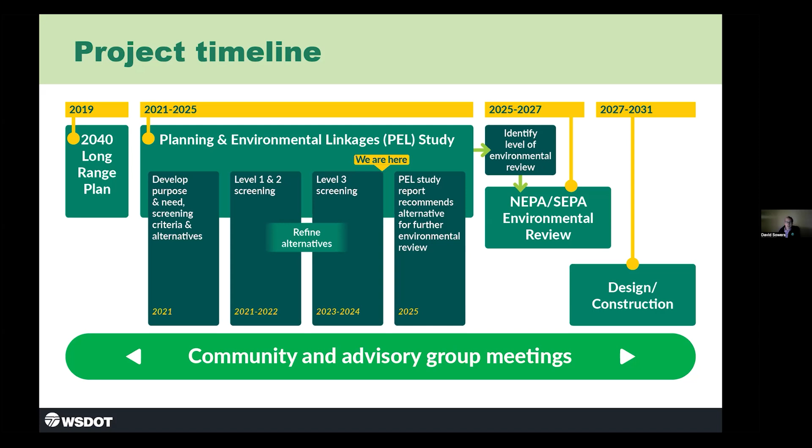Let's go to the next slide. So again, we've been through a couple levels here now in screening. We started out with 15 different alternatives for the Fauntleroy terminal. We narrowed that down in level 2, and in level 2 we narrowed it down essentially to the 2 alternatives that we have, but we've created some subsets of that. This is an important milestone for us because we're now at the point where we're ready to take what we've heard from you over the last several years. We've narrowed it down, we've looked at all of the criteria, and we're ready to share with you what the results were and carry forward into the environmental process a single option.

The CAG roadmap - we're getting towards the end, let's say. You can see the various steps that we've taken along the way. There was obviously a number of different topics that we've tackled through different products that our consultant teams helped us with: the traffic study, intersection analysis, the environmental analysis, and so on and so forth. And all of that culminates in where we're at today with the final level 3 screening results, and an opportunity for you all to weigh in on what we've concluded, and identify any other things that you would like to bring forward on the alternatives that we're going to present in front of you.

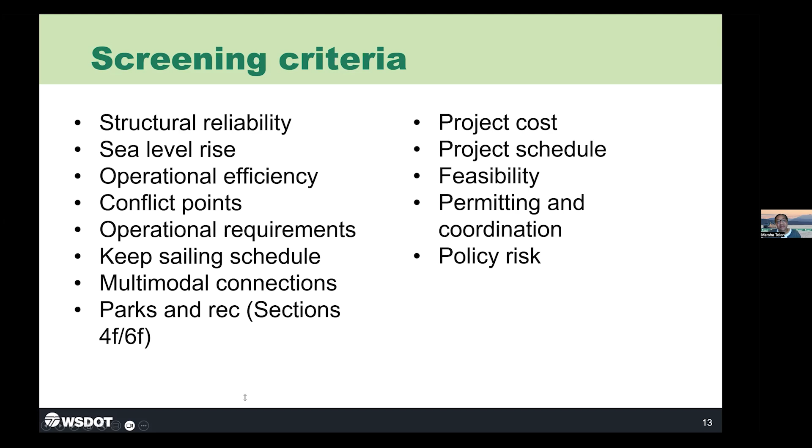The next couple of slides highlight the level 3 screening results. The dark green boxes represent the highest performance rating, lighter green indicates medium performance, and white shows low performance. Haley is going to add a copy of the report in the chat, so if you want to follow along, you can do so.

The screening results showed some factors perform the same across all alternatives. For example, we're building a structurally sound terminal that will accommodate rising sea level, regardless of which alternative advances. That came through clearly in these summary slides.

Regarding the key criteria, in reviewing the results, we focused on the performance factors that differ between alternatives, in particular operational efficiency and environmental factors. These two categories are most critical to meeting our purpose and need, while minimizing impacts to the surrounding environment and community as much as possible.

We have heard from all 3 advisory groups and our tribal partners about the importance of minimizing impacts to the surrounding environment and building a terminal that operates more efficiently. As you can see from the shading, alternatives B and B3 have the most dark and light green boxes. Next, we'll dig into these results and talk more about what this means.

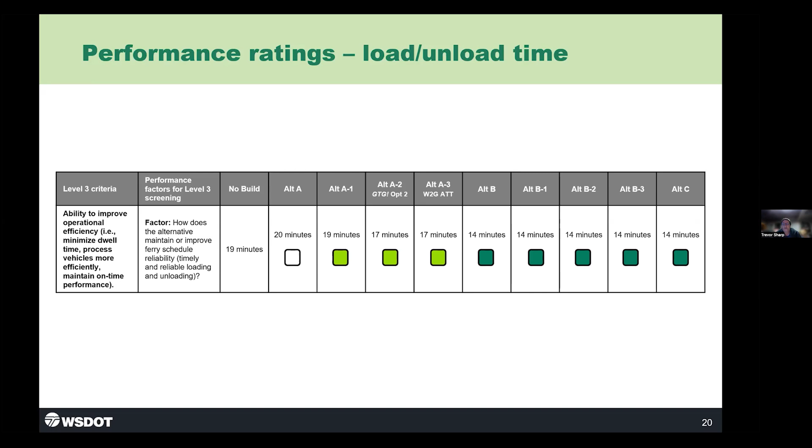Our next performance rating was queuing. This key factor looks at impacts to vehicles queuing on Fauntleroy Way. WSF estimated queuing of vehicles for weekday and weekend conditions. High performance rating meant a lower percentage of sailings with queuing, shorter queue lengths overall, shorter peak queue lengths, and/or faster reduction of queue length over time. Medium meant similar percentage of sailings with queuing and shorter queue lengths, or faster reduction in queue length over time. Low meant a higher percentage of sailings with queuing, greater queue lengths overall, greater peak queue lengths, and/or slower reduction of queue lengths over time.

And there was our rating: Alternative A was low, Alternatives A1, A2, and A3 were medium, and all the Alternative Bs and Alternative C were high.

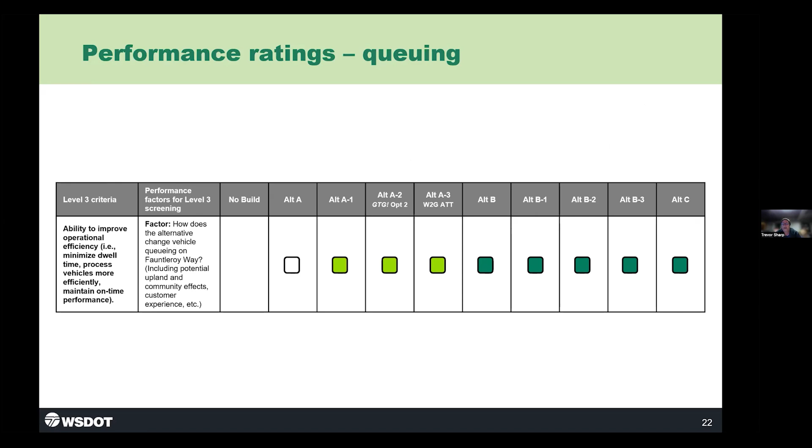Our next factor was vehicle staging. We designed all alternatives with wider lanes and improved lane configuration to better manage ferry loading and vehicle sorting for the dual destination sailings. High performance rating applied to alternatives with at least 4 full-length lanes of greater length, but no more than 4 full-length lanes where half-length lanes are used. Medium applied to alternatives with more than 4 full-length lanes of greater length where half-length lanes are used. WSF reviewed the largest dock configuration, Alternative C, with 5 full-length lanes and 2 half-length lanes, and determined that although it provides some improvement in staging ability, it may be challenging to manage vehicles. Low performance rating applied to alternatives that do not add full-length lanes.

Now the ratings: all A alternatives and B3 received low ratings. Alternative C received medium, and Alternatives B1, B, and B2 all received high ratings.

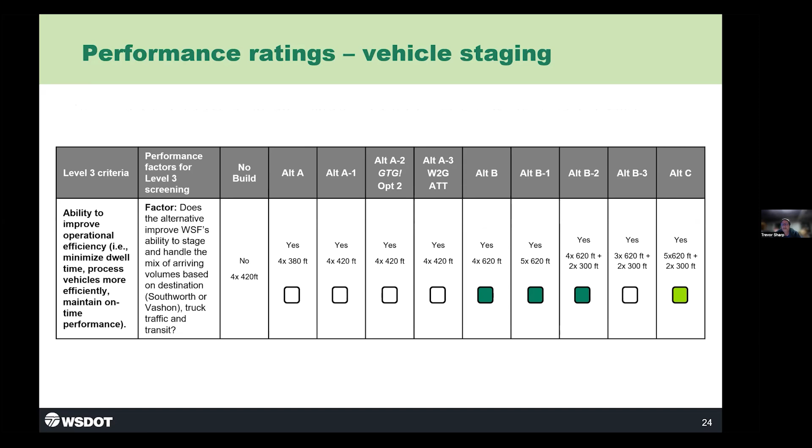Next up, vehicle sorting. WSF designed all alternatives to provide 1 12-foot ADA lane, 2 10-foot truck lanes, and 1 9-foot lane minimum to assist with accessibility, managing loading, and sorting vehicles. Our high performance rating applied to alternatives that provided more lanes and some longer lanes, providing the most space to sort and accommodate ADA, emergency vehicles, medical requests, and other preferential loading categories.

Our medium performance rating applied to alternatives that provide the same number of lanes and some longer lanes. These alternatives offer some improvement in the space to sort vehicles. Our low performance rating applied to alternatives that do not add or build longer lanes; these alternatives do not improve space to sort the vehicles.

And there you go: all A's are the low standard, Alternative B is a medium standard, and Alternatives B1, B2, B3, and Alternative C are all high standards.

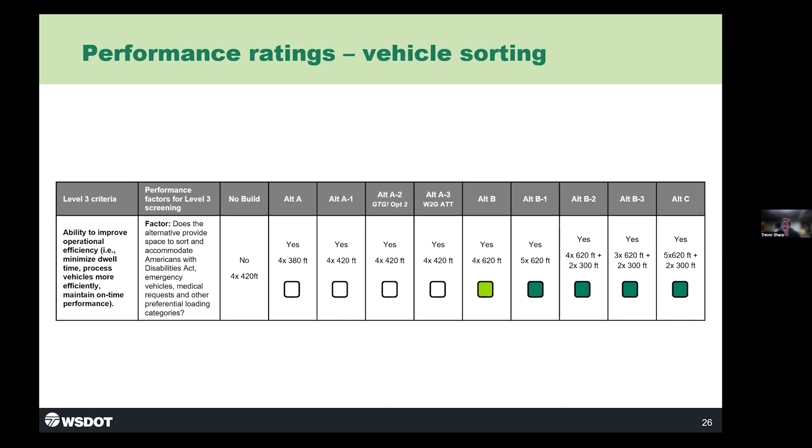The next factor we looked at was the distance for people walking, biking, and rolling onto the ferry. Our high performance rating applied to alternatives with a distance to walk, bike, or roll from Fauntleroy Way to the end of the vehicle transfer span of no more than the current dock, which is 850 feet. Medium performance rating applied to alternatives with a distance between 850 feet and 1,050 feet, less than 200 feet further than the current dock. We did consult our ADA specialist and noted that a walkway distance within 200 feet is similar from an accessibility standpoint if there are enough places to rest and an appropriate grade.

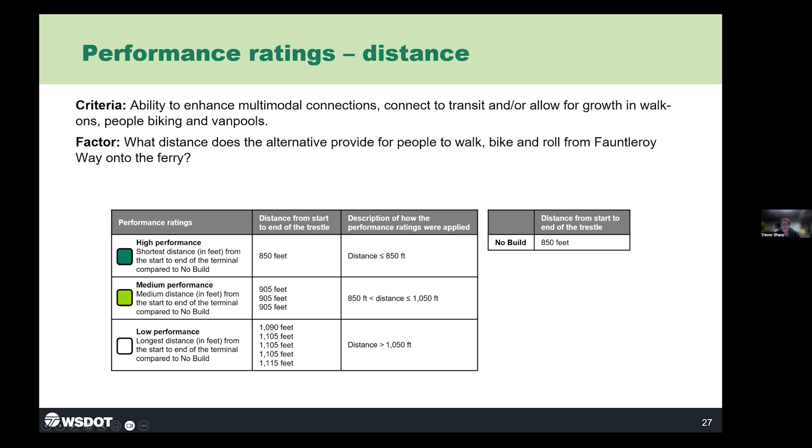We will consider incorporating those rest places during the next project phase. Our low performance rating applied to alternatives 1,050 feet or more, or more than 200 feet further than the current dock. The results: Alternative A was high, Alternatives A1, A2, and A3 were medium, and Alternative Bs and Alternative C were low.

And I believe next up is any questions for operations.

Trevor, we just did want to pause there. That's a lot of information, and I'm sure there are some questions and comments for Trevor. Trevor, the first one is simple, asking if the results are based on the 3-boat schedule at all times. Yes, it's one of our assumptions looking out to the future. Okay, thank you.

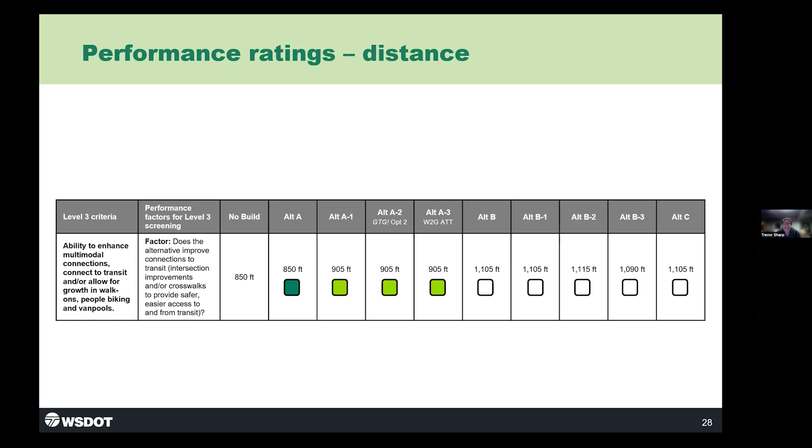One thing that confused me was under option C, the comment was made that it was maybe difficult to manage the operations, apparently because of the additional lane. That confuses me. It would seem like it might be simpler, but I'm curious why it would be more challenging.

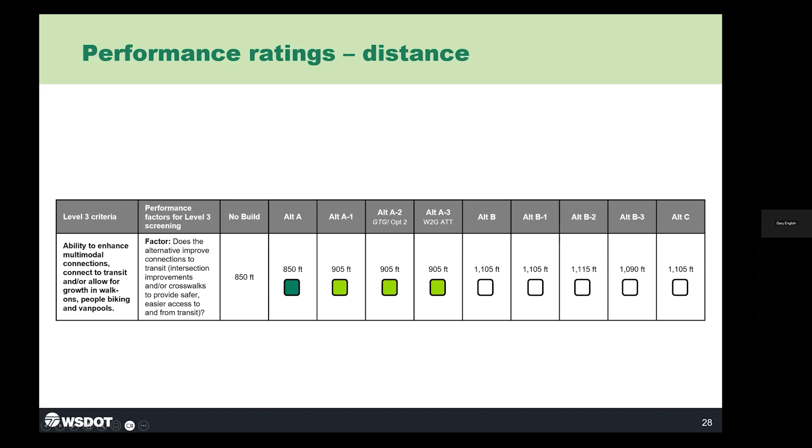The reason it's more challenging is if it was like a one destination place, it'd be a lot easier to manage because we could just keep rolling the lot over. When you get 2 destinations, like we are now, you have an 80-car lot and add another 100 cars onto it. If we loaded 124 cars on, we'd still have 60 cars left behind. For our staff, it's hard to figure out with a dual destination which vehicles are going to go first and which ones aren't. Does that make sense, Gary?

I understand where the rationale comes from, but it doesn't make sense. We have people that have been moving cars on the docks for decades, essentially, and you're saying because we have a bigger dock, it's more difficult to do what we have been doing for a long time. That doesn't make sense. Well, we're looking for efficiency is what we're looking for.

My retort to that is, if I have an additional lane, which the C dock does, then I would think I'd have more options for efficiency. I could load whatever group I want to put in there. I just don't see that comment fits the C. But I'm going to leave it with you guys because you're the ones that have to make it work, not me. I just have to ride.

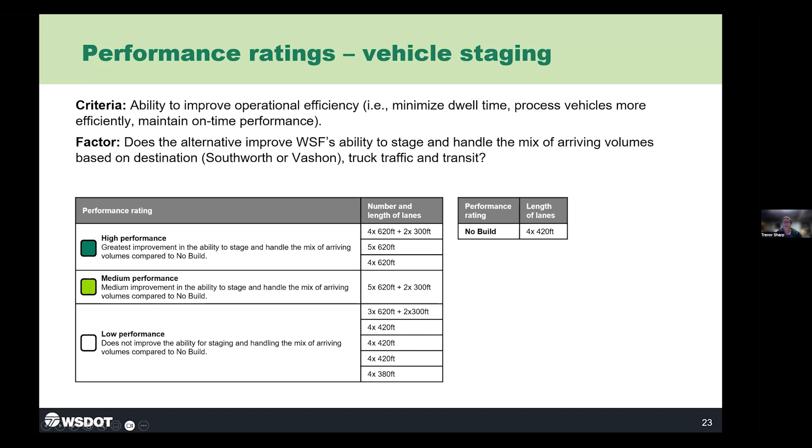I'm not sure. Charlie, can you, or Laura, can you bring up B1? Because if I'm not mistaken, B3 does have half lanes. Or am I thinking of the 155s, B1 and B2? But yeah, I think I was thinking B had the longer lanes. B had the same length with two extra short lanes, or B3, B2, B3 did.

...traffic there. And then I see Mark Bandy is maybe off mute. Mark, are you able to come in? There you go, Mark.

Yeah, thanks. Let me try and add on to both Gary and Marty's comments. Part of the dialogue here was really this kind of combination of having an odd full length lane and then the half lanes. That was what, when we talked with Trevor and his other operations colleagues, as Trevor alluded to, just managing the sorting and staging when you're out on the terminal, on the dock itself, with the odd number of lanes and which one's full, and then a couple half length lanes. That's where a larger number of lanes, even in terms of number of vehicles it can hold, becomes a bit more complex and therefore less efficient from how the operation staff felt about it once you're looking at that type of configuration.

Yeah, I see that they have the alternatives up on the screen there, and you can see the confusion because B and B3, it's not really half lane. I mean, the lanes are almost identical except for the very close to toll booth zone 1 area.

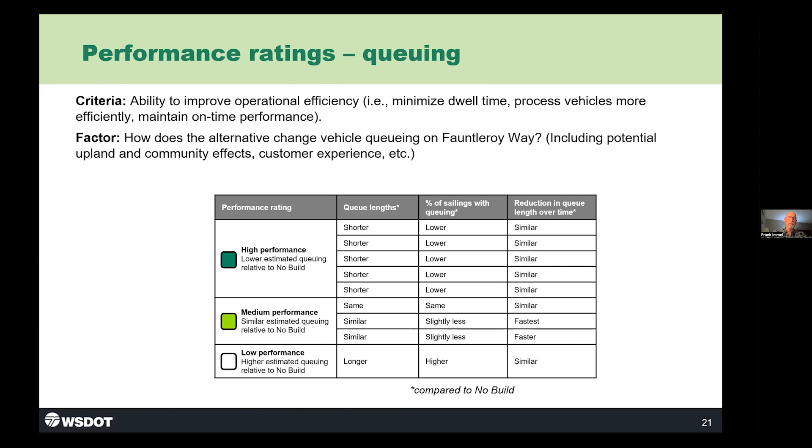Thank you. Can we go back to the slide that shows the dwell time or the loading times? I guess this is the first time I'm seeing that slide. I apologize if it's been shown somewhere I haven't seen. It is shown this way - that's the queuing, the loading time.

So the under 15 minutes, there's so many variables that go into the loading time. I guess you're saying that it's going to save 4 minutes by having a larger dock than the A options. Is that my understanding?

I suppose it's easier if I'm off mute. Yes, you are correct, Frank. And then, but yet the medium performance shows that it reduces dwell load/unload time by up to 20%, and it's anticipated to have some improvement in time performance compared to the no-build option, whereas the other options, the longer docks, significantly improve on-time performance.

Correct. And these are modeled times, correct? Not stopwatch times taken at various times of various days - just modeled? Modeled. So we have no idea how these will actually play out.

Mark, do you want to say a little bit more about the assumptions? Frank, you'll recall when we walked through these results a couple of meetings ago - this is using a traffic simulation model.

It's basically representing the operation of the current dock. You baseline against that, and then use inputs about observations - how long it takes to unload vehicles, walk time, bike time, as well as load time - and then it's comparing that baseline, essentially the existing dock size, to the different alternative dock sizes.

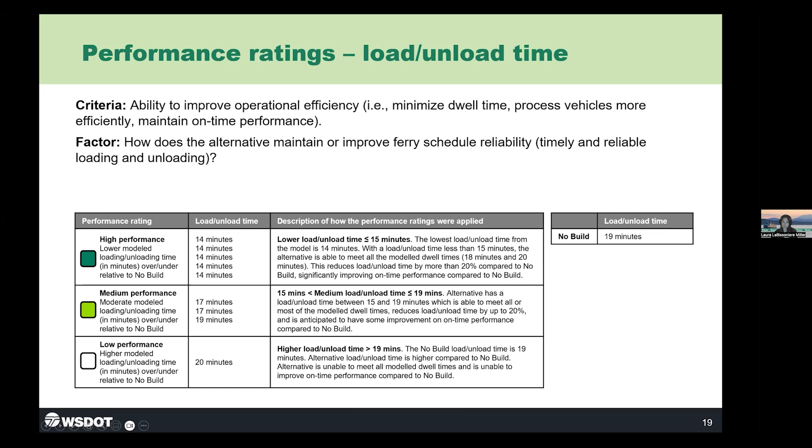Yeah, I think to clarify, if you want to go back to that slide Haley - what Marcia was just explaining is that these are the work products that our team and the analysis that the team has used to think about screening. Many of them are ones we've talked about in detail.

I know when we get a little bit further into looking at the results, maybe Dave can say a little bit more about how we're thinking about costs in the context of screening. But you're right, that's not one where we've sent out a detailed report like the others.

And I also have one basic question, which is these are drafts that you have sent to us, and I understood from long ago that you're taking one alternative forward to the NEPA SEPA. And although we had no input in the decision to get to B or B3, are both of those going forward, or is only one of those going forward?

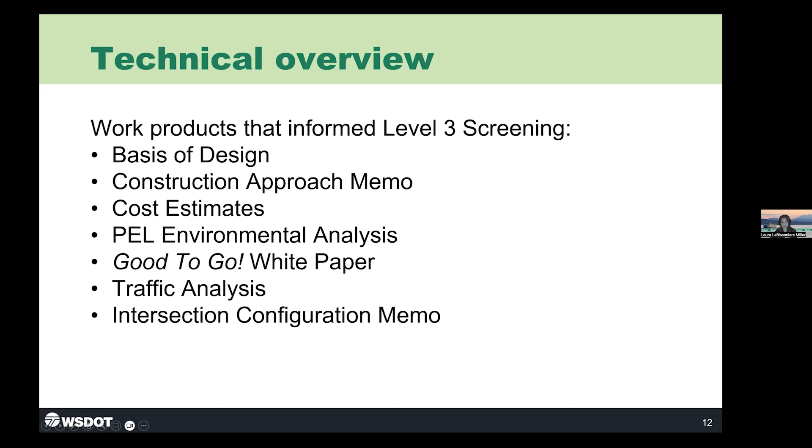Yeah, I think with that comment, Marty, if we could have you hold until the end - Marcia is going to talk a little bit more about environmental, and then we can talk about the process and how we've used the feedback we've heard from all three communities to get to this.

The only reason I bring it up at this point is - are we here today to comment on B1 and B and B3, or are we here to comment on everything?

Because, or is everything else already gone? Yeah, I think that's a great question. We really are seeking your input on the information we've collected up to this point, the analysis. Do you have questions about the process itself, about how we're taking this information and evaluating the alternatives, and certainly we're open to feedback on the alternatives themselves.

And this is not the last point before we wrap up the PEL study, so we'll also talk about other upcoming opportunities for input. I'll just add another comment to your answer there, Laura. You've seen a lot of these work products and commented on them, and those are no longer drafts. We've finalized those documents.

What we were hoping to get out of this evening is for you to look at how we then applied those factors, the 14 minutes, the 19 minutes, the so many square feet here, the so many there, look at how we divided up these areas and assigned low, medium, and high performance ratings, and give us some feedback on how we did the math.

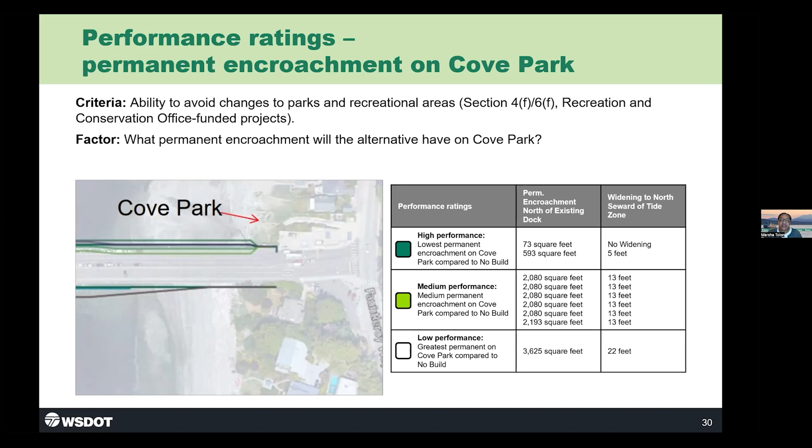The results came out to be that alternative B1 received a low performance rating. The A alternatives and B received a medium performance rating, and B2 and B3 received a high performance rating.

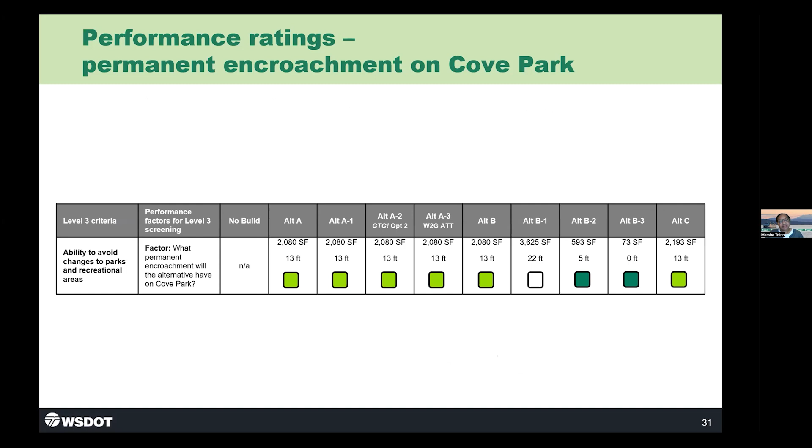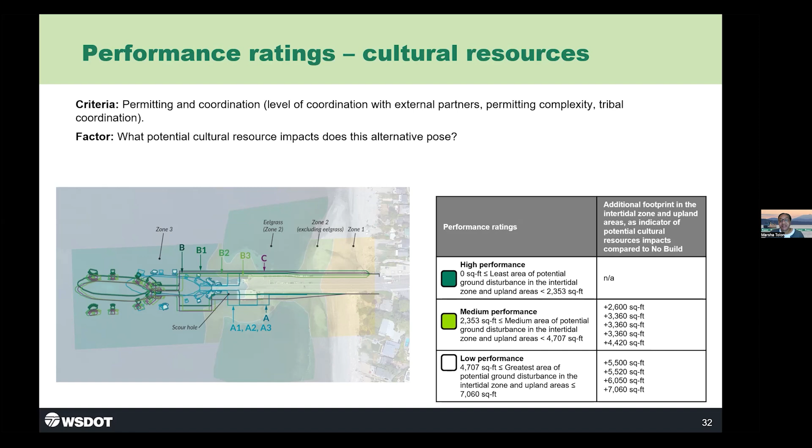For overwater coverage, looking at how each alternative increases that overwater coverage, those that performed high had the least additional overwater coverage, up to 16,667 square feet. The medium performance was with additional overwater coverage between 16,667 and 33,333 square feet, with a low performance rating between 33,333 square feet and 50,000 square feet.

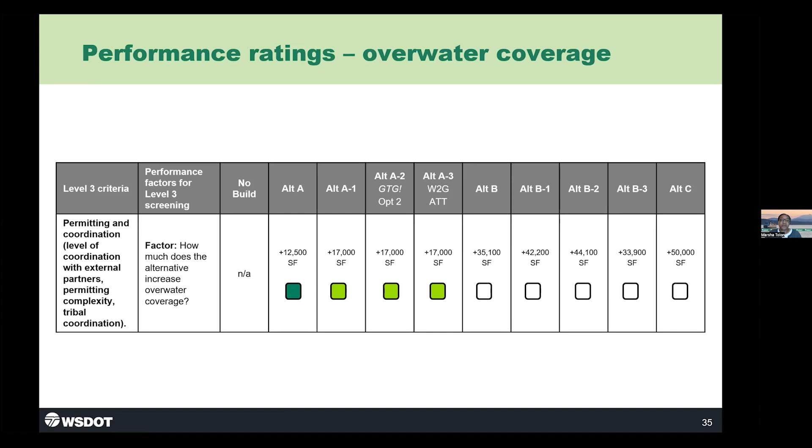The results showed that the rest of the A alternatives received medium performance ratings, and B and C alternatives had low performance ratings in this category.

Let's move to mitigation cost. Indicators of environmental mitigation costs include the increase in overwater coverage in Zone 2. And Zone 2, if you remember, provides the nearshore habitat for eelgrass and macroalgae, and the increase in total overwater coverage.

Moving the dock and berthing structures further offshore into deeper water improves WSF's opportunity to restore eelgrass and macroalgae. This helps reduce or eliminate ferry propeller wash from eroding the scour hole, and may allow for eelgrass and macroalgae to grow in Zone 2.

With the high performance rating, there is no increase of overwater coverage in Zone 2, and no increase of total overwater coverage. We expect these would have the least environmental mitigation cost.

For medium performance rating, the smallest increase of overwater coverage in Zone 2, or the smallest increase of total overwater coverage, and those that perform low had the greatest increase of total overwater coverage, and a medium to high increase of overwater coverage in Zone 2. We expected that these would have the greatest environmental mitigation cost.

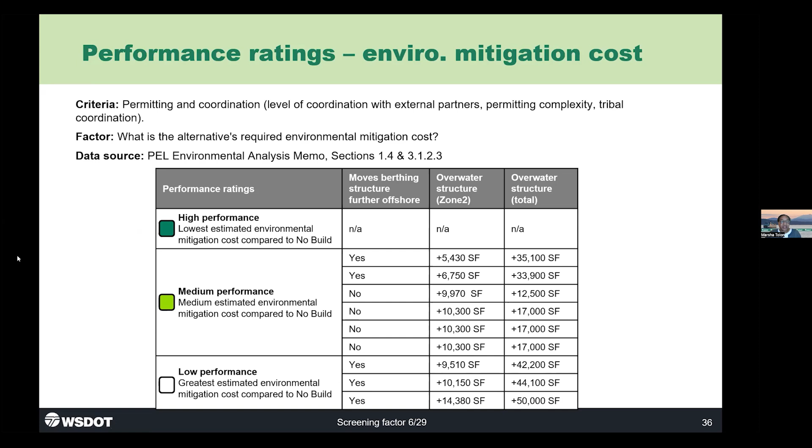The results came out to be that alternative B and B3 received medium performance ratings. A alternatives received medium performance ratings, and alternative B1, B2, and C received low performance ratings.

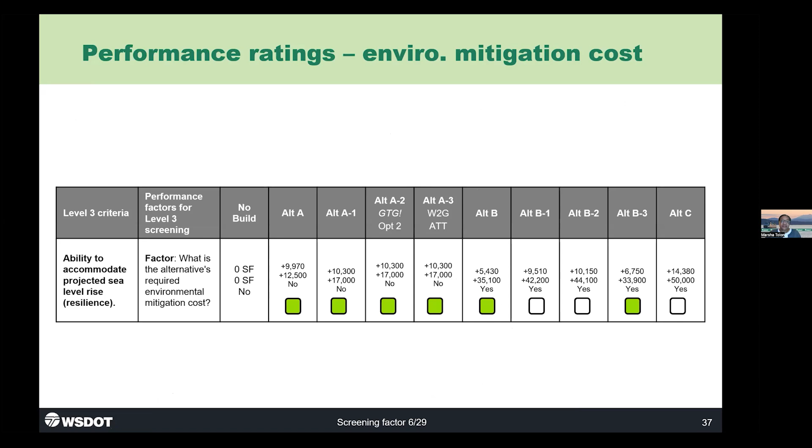The next category is eelgrass restoration. This looks at the impact or provides opportunities to restore macroalgae and eelgrass. By moving berthing structures further offshore into deeper waters, it reduces or eliminates ferry propeller wash disturbance within Zone 2, and potentially allows for restoring eelgrass and macroalgae.

High performance rating is when we move the dock and berthing structures further offshore, and have the smallest increase in overwater coverage in Zone 2. A medium performance rating is when we move the dock and berthing structures further offshore and have a medium increase in overwater coverage in Zone 2. Alternatives that perform low do not move the dock and berthing structures further offshore, or have the highest increase in overwater coverage in Zone 2.

The results from this screening came out to be that it was all centered around looking at the potential for eelgrass restoration. Alternative B is the only alternative to receive a high performance rating. The rest of the B alternatives had medium performance ratings, while the A and C alternatives had a low performance rating.

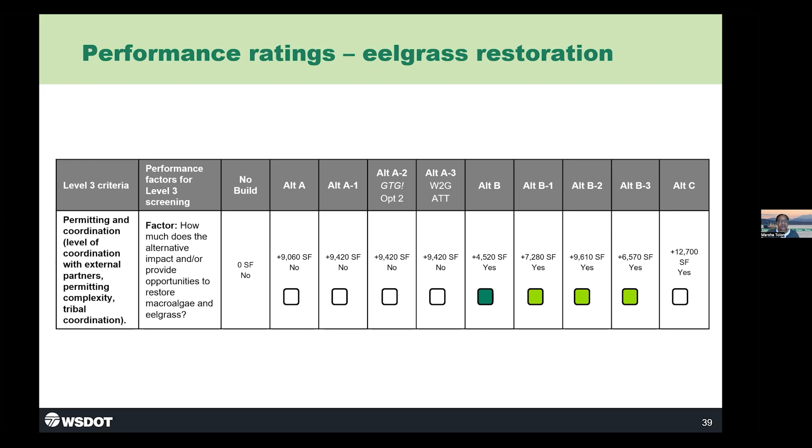So Mark, I'll turn it over to you to explain this screening results.

Yeah, thank you Marsha. We've got lots of time to dive into specifics, but you've heard a nice overview on the two principal categories that drove a lot of the scoring, operational efficiency and permitting and coordination. Somebody made a comment in the chat about the Academy Awards and the drama associated with this.

Pulling back the curtain for those who haven't already looked at the report, what we're recommending to advance is a footprint based on alternatives B and B3, which accommodate somewhere between 124 and 155 vehicles on the dock. I'll caveat that those two alternatives scored the best in our calculus, with B2 a very close second. Alternatives A and C scored lower, and that's where we landed.

I'll highlight a couple of specifics. With alternative A, while it minimized overwater coverage, it also minimized the benefit to operational efficiency. So while it has an environmental advantage, it doesn't allow us to repair the scour hole that's been caused over time or mitigate some of the eelgrass that's been lost there.

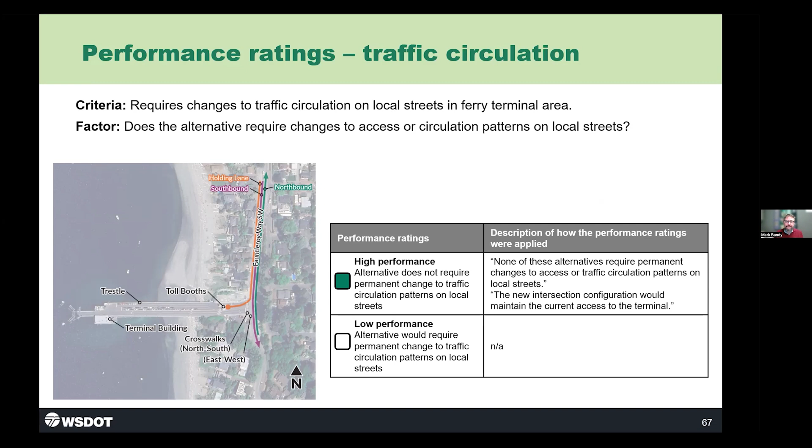Angus, let me start with just a quick question, a reminder please. The focus on eelgrass is around salmon in the very young stage and Dungeness crab. Are there other species that are being protected here?

Well, Angus, I'm not a biologist, but the health of the eelgrass is an indicator of the health of the nearshore environment. So there are a lot of species that live within it, as well as forage fish. It's an appropriate zone for that sea life as well. So it's not just salmon and Dungeness crab, but there's sand lance or species that need that seagrass to be available.

And then have you thought about, or do you think about, the underwater artificial reef aspect to the dock? Like that would be anti-correlated with coverage, right? We've got endangered rockfish in Puget Sound. We've got ling cod, which are fairly protected species in Puget Sound.

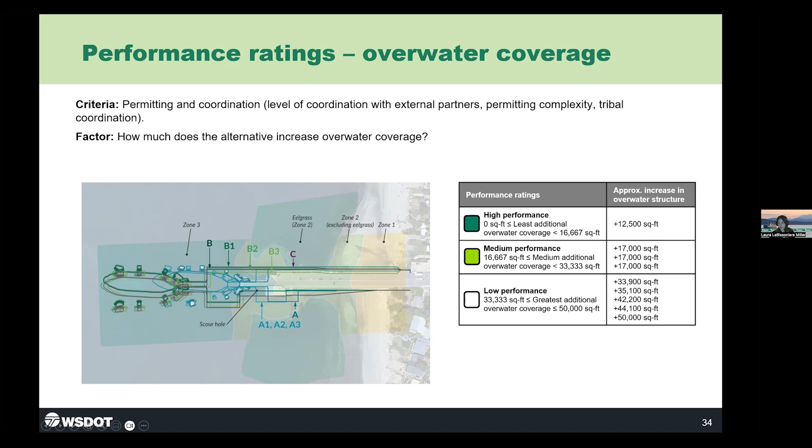We've been getting a number of questions and comments in the chat here, so I just want to acknowledge some of those. Devin is in agreement with Justin about future-proofing dock size for future potential ferries, such as an Olympic class, needing to be a priority. Thank you for that, Devin.

It looks like Victoria had a question here about if the boats are running at full capacity currently, and John Vizina has provided a link to our public dashboard that shows their performance by boat and route. Lots of information there, just putting those up on the chat.

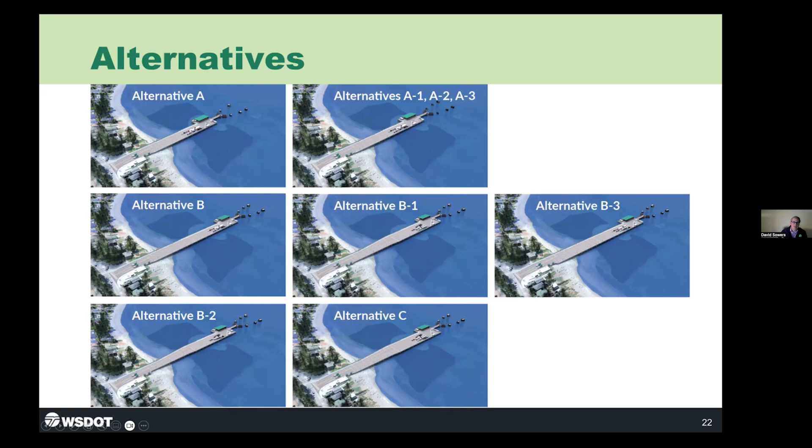Yeah, you want to respond to that? Well, the second slip was never in the original scope, but what surfaced as we did the constructability reviews is that by all measures, no matter how you divide this up, no matter which option you pick, we need to have a second temporary slip so that we can build part of the structure and operate it, and then swap and move the traffic over to the new structure. The only way to do that is to have a second slip off the end of the dock to the north, like this view shows.

But that is not something we're pursuing in our permitting process. It's not something we see having permanency there. We do have a project at Southworth considering adding a second slip, and the legislature is aware of that, but we have not forwarded that concept here. We've heard it, Susan, throughout this process - folks have talked about it in terms of on-time performance, reliability, and the ability to start loading while finishing another unload. Trevor is on the call and knows the benefits of having two slips at any terminal, especially if a slip's not working that day for some mechanical or electrical reason. So it's a good point, it's just not in the cards with the project the way it's scoped.

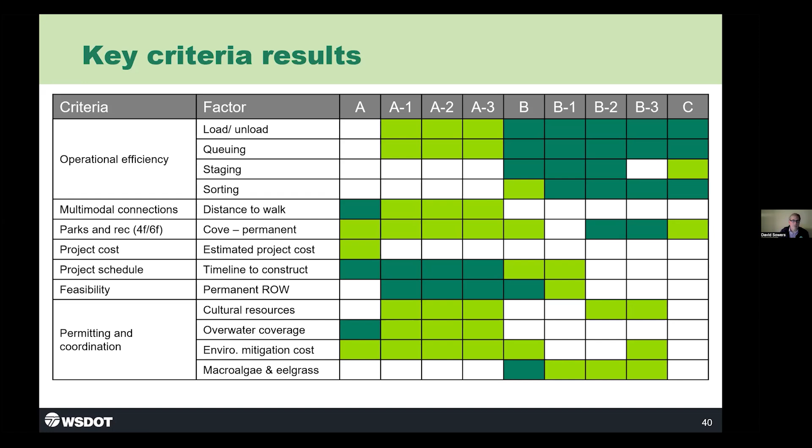When I made my weighting comment, it was more in terms of how we assigned the greens, the light green, dark green, and white, to this amount of square footage of overwater coverage, or this amount of minutes of savings of time, and where we tried to draw lines between 20 minutes and 15 minutes. I'd like feedback there if you think those could be improved upon, or if you have a different perspective. Sometimes it's hard to separate things that just vary in shade of gray, versus more yes or no, so that kind of input would be helpful.

Any input is helpful and would feed this process.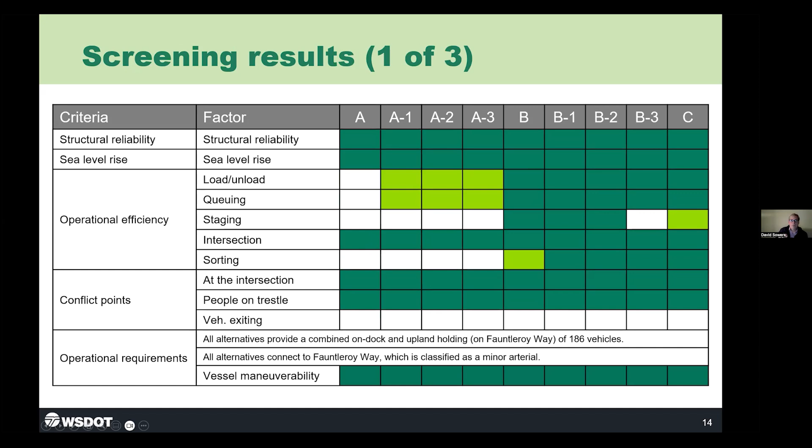Am I correct that there's a second page to this key criteria results as well? There were 3 pages at the beginning of the presentation with all of the screening criteria. But what we did in that last sheet is we took off the criteria where they were all the same color. For example, on structural reliability and sea level rise, every alternative will be designed to the latest standard, so we didn't put that in the last sheet because everybody's going to be a solid green. If there was any difference between the alternatives, we put it on this last sheet, which we call the summary of the key criteria. It's not meant to take away from all the other criteria. Okay, thank you very much.

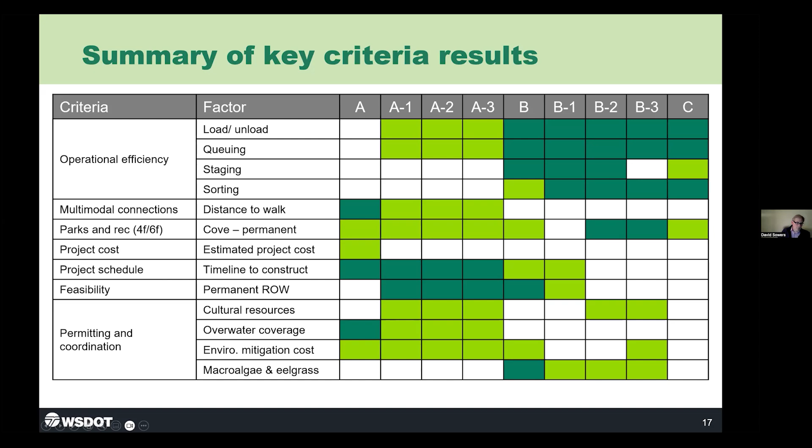Marty? In the tag meeting, there was a discussion of the intersection. Do we have time to talk about that tonight, or is that something to send to the Fauntleroy Terminal Project questions? Well, Charlie Torres is on the call, he's the project manager for that. Charlie, do you want to address it? I just had a couple of questions.

When we were first discussing it in meetings long ago, all 3 communities wanted to know who to contact if there were problems. Fauntleroy was concerned about the length of the traffic light, the pedestrian island, and pedestrian usage of the buttons. The commuting communities were concerned about how they report and what to do with line cutters, which will be important especially during the construction period. There was also a question about motorcycles and bicycles and how they access their lane safely. So those were the three questions I can remember.

Frank, maybe you have some others, but just some more input on that: who to contact, how do the motorcycles get there, and what do we do about the line cutters?

That's a lot to process. And it looks like Charlie jumped off the call. Nope, there he is. Okay. Yeah, can you hear me? Yeah, I'll give it a shot, but I might need someone to rescue me. I got your back, Charlie.

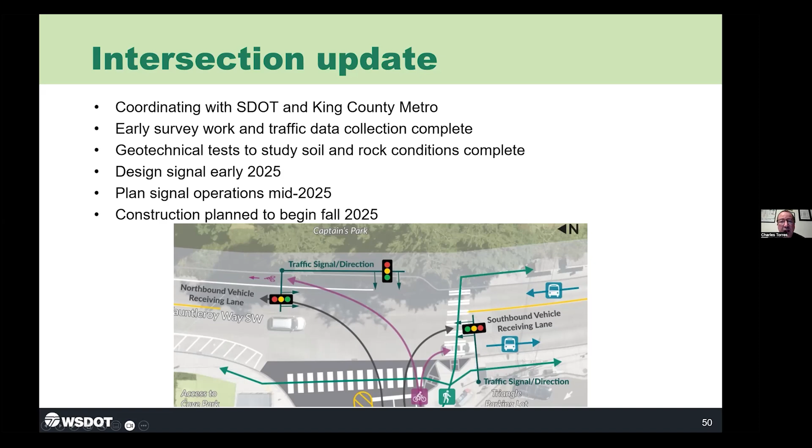Marty, you also had some comments on bicycles, motorcycles, and line cutters. Yeah, so the new lane with the bicycles and motorcycles going through, they will be accessing it through the standard traffic lane, not the queue, and then weaving in. And that's been a question that people have questioned and wondered how that will be done safely, and I'm sure you've thought about that.

We've thought about it. I like how Marcia answered some of the questions, that we're in this planning phase now.

We haven't, I hate to just call it a detail because it's such an important detail, but it's something we're all going to work on and see if we're doing this correctly. I know at Mukilteo we had to worry about inadvertently creating a skateboard park when we didn't want one. But we went through design to make sure we didn't accidentally create some unintended consequence we weren't happy with. But I think the things you're talking about are going to happen in this next chapter. Stay tuned.

And for line cutters, I need a lot of help to figure out what to do with line cutters. Honestly, I would hope that we could use that officer to start controlling that line, but like we said, it's all a process.